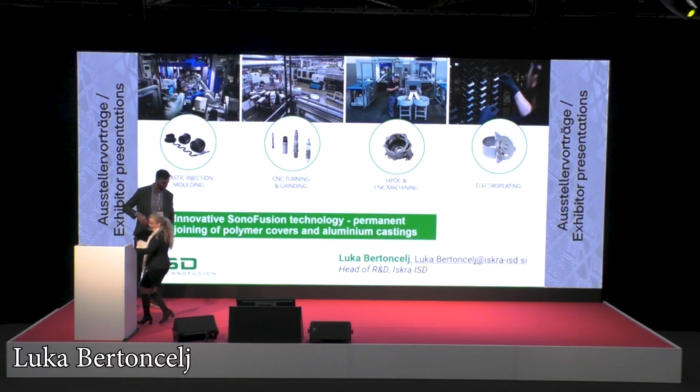Hello from my side. My name is Luka Bertoncelj. I'm responsible for R&D at the company Iskra ISD.

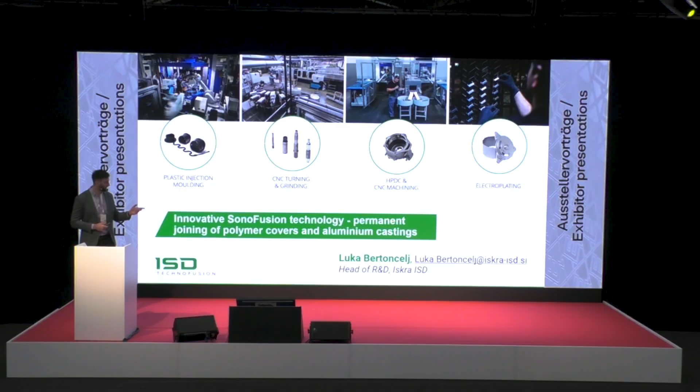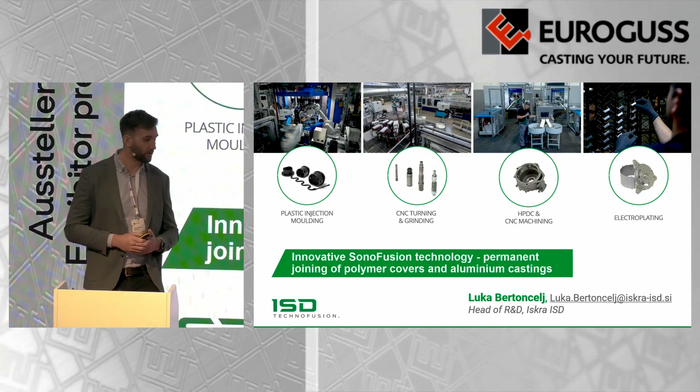Today I will be presenting a topic which is not directly related to casting itself, but a combination of casting, plastic injection molding, and joining. First, just a few brief slides about the company, I won't be too boring with this.

In general, we're focused on automotive and commercial vehicles. This is our main focus, but we're also present in medicine, electronics, and other relevant industries. We work together with the usual suspects from automotive, mainly Tier 1 suppliers.

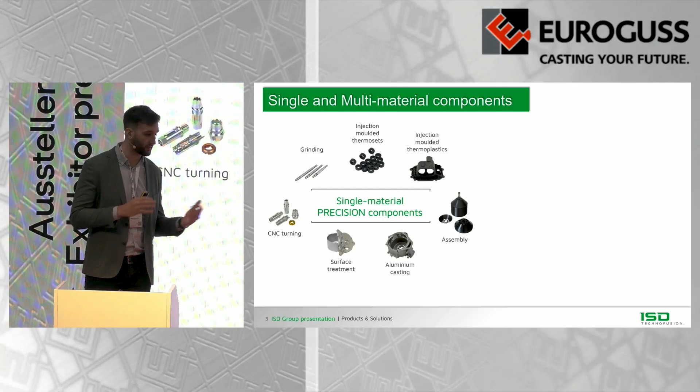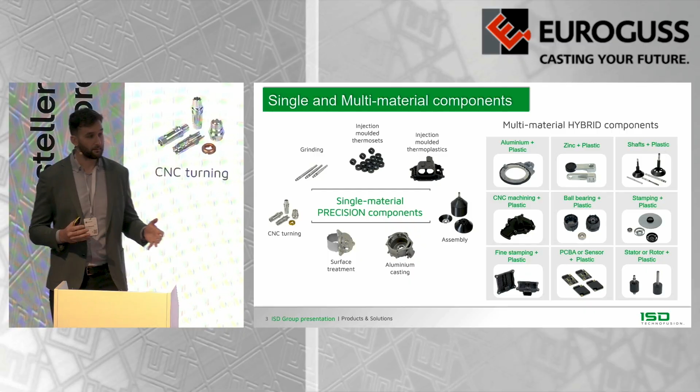Our focus was originally in high-precision single material components, such as plastic parts from technical polymers, aluminium pressure casting, turning, machining, and electroplating. But in the last 5 years, we've really focused on multi-material hybrid solutions, meaning you join metals and polymers, because in some cases you need mechanical strength from metals, but then you need other properties from polymers which cannot be substituted with other metals.

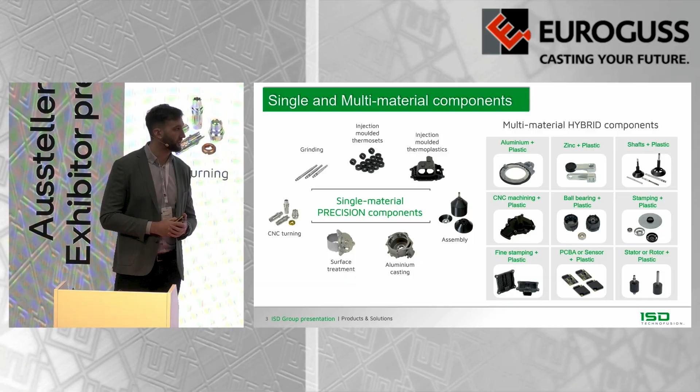So it means we always try to combine these different manufacturing technologies, such as plastic injection molding, casting, machining, and turning, to then develop and produce unique hybrid solutions.

We have two proprietary technologies that we see as definitely a benefit for the challenges in the upcoming future. The first one is LaserFusion, and the second one, which I'll be presenting today, is SonoFusion.

In short, LaserFusion is basically surface modification of metal surfaces for consequent injection overmolding or onmolding of polymers. So you avoid using glues, plasma treatment, or any other surface activation methods to join polymers and metals together. With SonoFusion, the difference is that you prefabricate the polymer and metal part, and then consequently join them together. So today I will be presenting this technology.

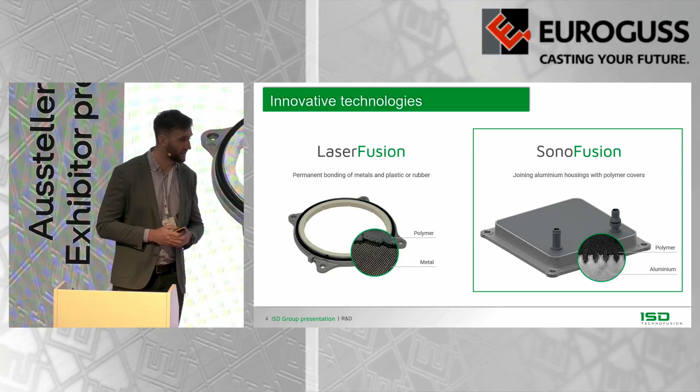But perhaps in short, we should look at why such a solution would make sense for the upcoming challenges. We know that especially in automotive, but also other industries, size matters.

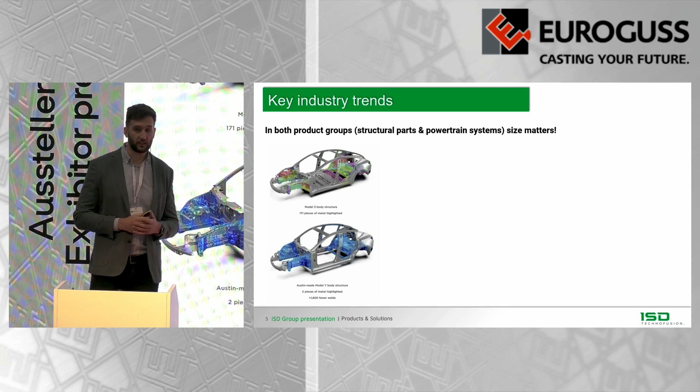I would say there are two major trends we see right now. On one side, you have larger and larger structural components, gigacastings, which Tesla started. Now Volkswagen has also presented their own first gigacasting or megacasting, as they call it. So we see structural parts increasing in size because cars are a commoditized product now, meaning everyone tries to manufacture a car with the least amount of components necessary to have the desired function.

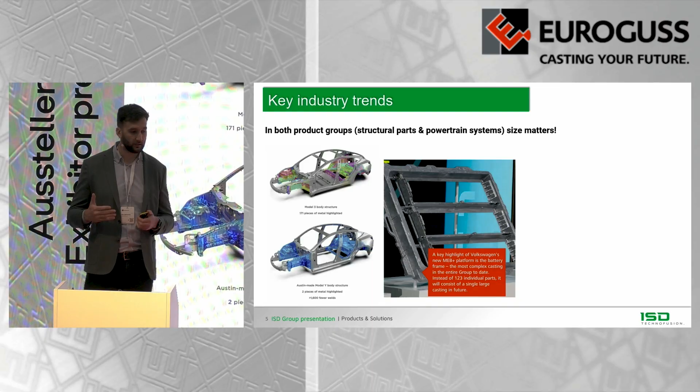On the other side, we have propulsion units, which we see shrinking in size, meaning because of higher efficiencies of electric motors and powertrain units, the powertrain units themselves are reducing in size while power density is increasing. So our company is especially focused on this side.

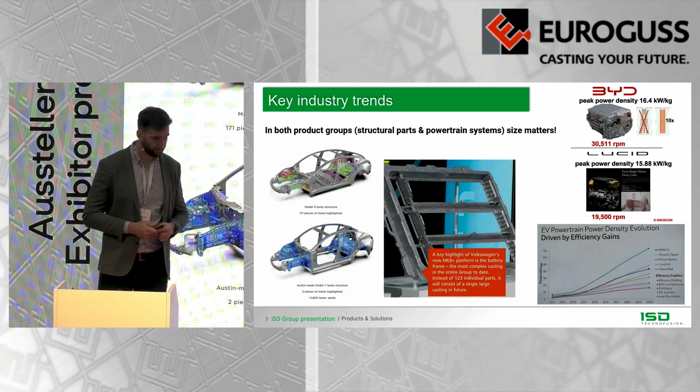Also, regarding trends in e-mobility, we see that in the last 2 or 3 years there was a very harsh market push for electric vehicles. Now we see a record number of new electric vehicles being registered, and obviously in the upcoming years this trend will most likely keep going.

But every single electric car faces the same problem: thermal management. How to regulate temperature, how to remove heat from areas where it's not necessary or needed, and take the heat to the locations where it is needed.

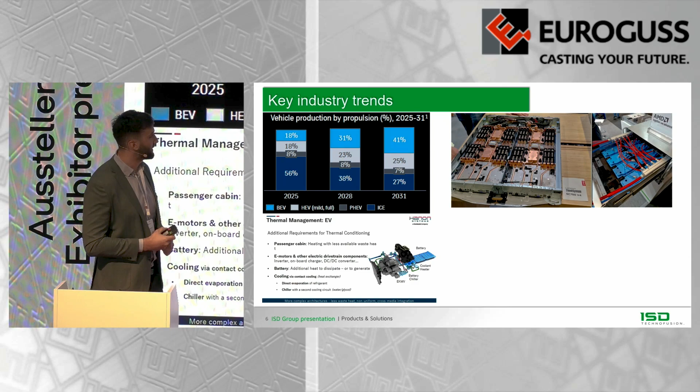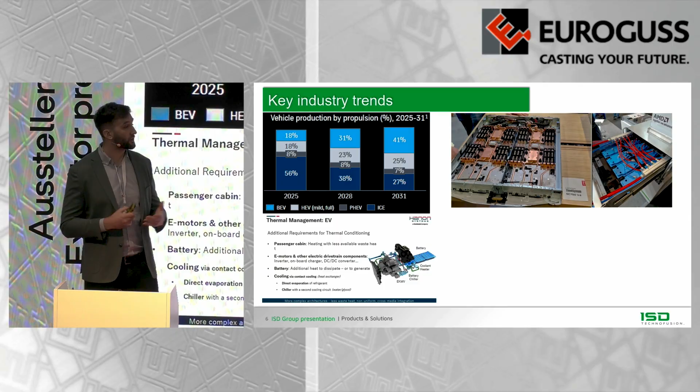We can see from one of the presentations of Hanon that everything evolves around thermal management. The same philosophy applies to AI computing. Last year we visited the AI computing fair in Hamburg, where AMD, NVIDIA, and other OEMs in the computer industry showcased their thermal management solutions. You can see the same philosophy of how to remove heat from areas where it's not wanted. So we see the same challenges arise in both industries.

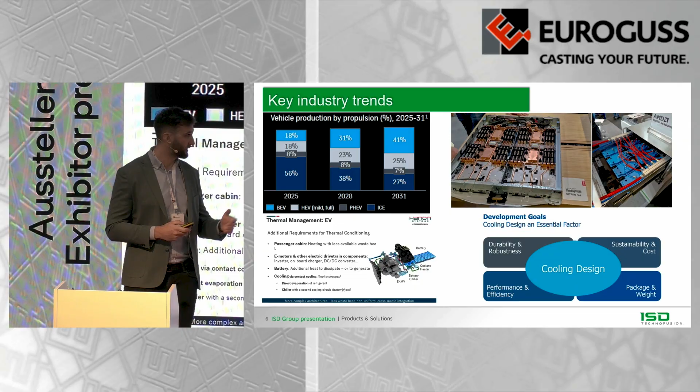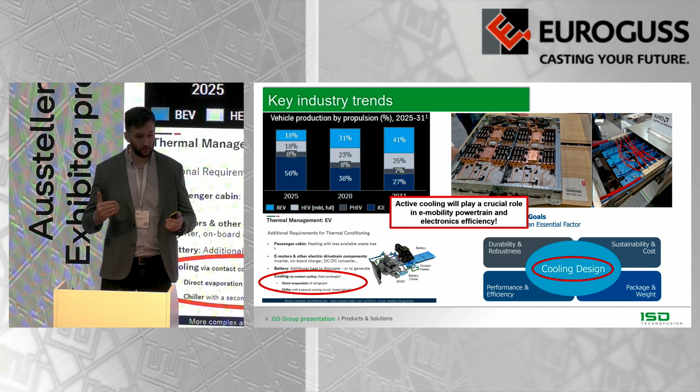If you also check the development goals of ZF, a German Tier 1 supplier, you can see that for their electric motor design, cooling is in the center. It means everything involves cooling, which means that in e-mobility, to increase efficiency, you need good, technically well-suited thermal management solutions.

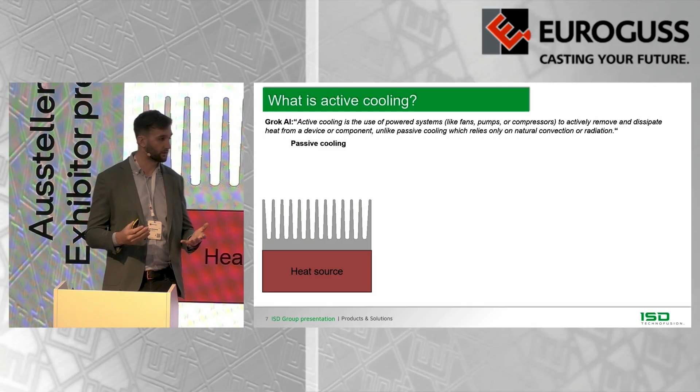If you first take a look at passive cooling, if you have a heat source - it can be a chip, it can be an electric motor - you basically just position on top a material with high heat conductivity, with some specific design features to increase the surface area. You're limited more or less by the convection and radiation, which is limited to the material characteristics and the design itself. So you're very limited in how much heat you can take out.

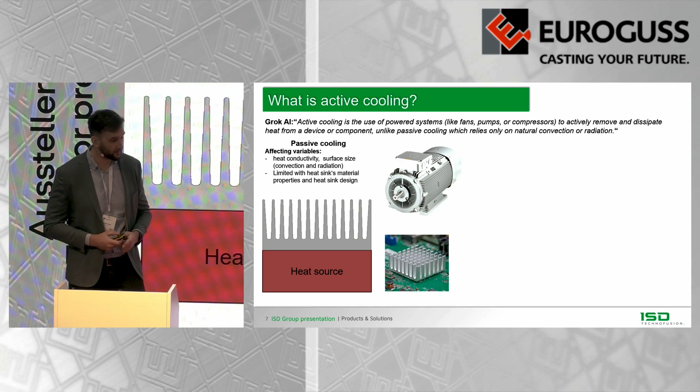We see this solution quite commonly in industrial electric motors, where you see all these fins to remove the heat, or even in electrical applications where you have heat sinks with different ribs, again to improve heat removal. But the main problem comes when we're speaking about powertrain units.

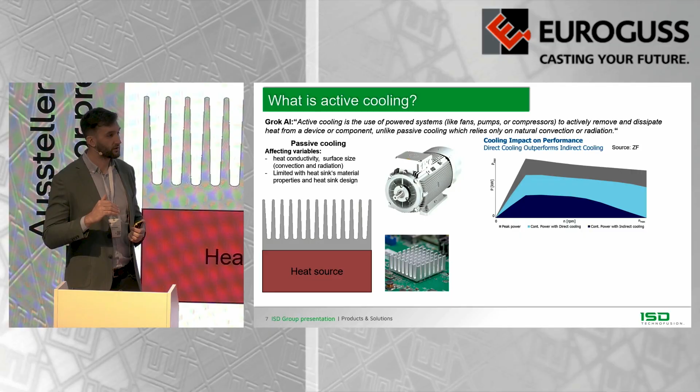For example, this is a graph from ZF that shows how much of a difference an electric motor makes if it's actively cooled in contrary to passive cooling. It means you can have almost twice as high continuous output power. So it definitely makes sense to work on different concepts and ways to actively cool either the stator package, the rotor itself, or any powertrain or electrical components where you have high currents. High currents mean high heat losses.

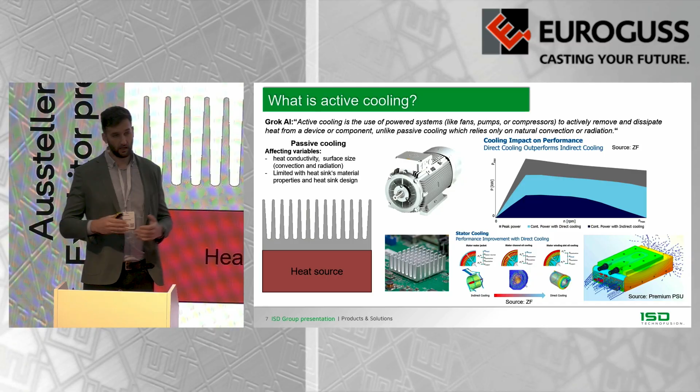Active cooling itself is obviously not the cheapest solution because, again, you need a pump, you have leakage tightness challenges and so on, but the efficiency increase is so much higher that for high-end applications it's definitely the future.

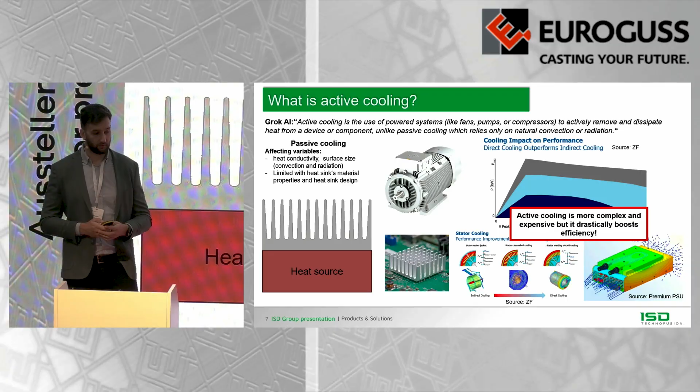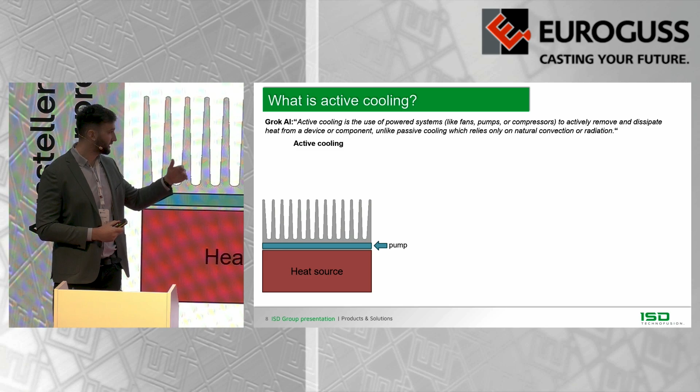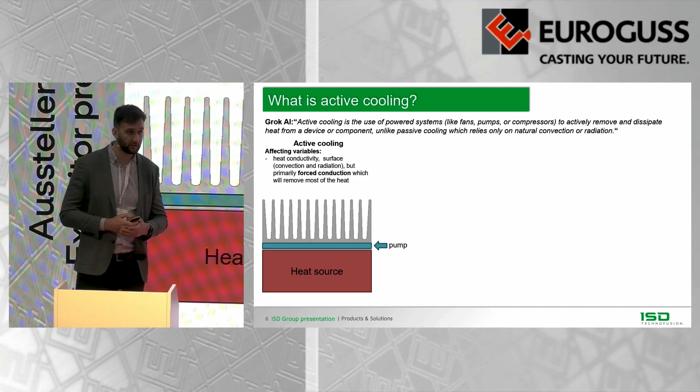If you take a very simple active cooling concept and just upgrade our passive cooling from before, you basically just need some kind of cooling channel integrated inside the heatsink, and then a pump that pushes the medium through. In this case, you have forced convection, which will remove most of the heat, or be the main mechanism to remove the excessive heat.

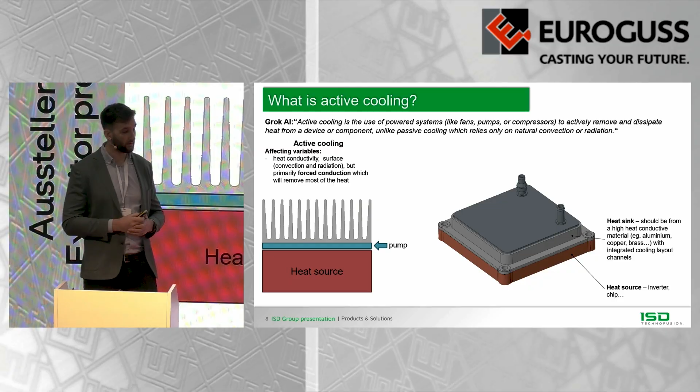In practice, it means you have a heat source, then you put a heatsink - a metal that has high heat conductivity. It can be a high-pressure die casting part, even though aluminium alloys for casting, due to high silicium content, have much lower conductivity than standard aluminium. Then you need a cover to cover everything up, and an inlet and outlet to push the medium through. And obviously, in the end, you need a pump that will push the glycol or whatever you might be using to remove the excessive heat.

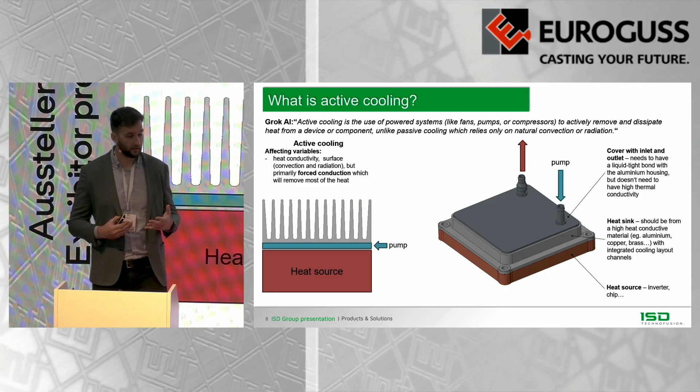The main question, obviously, is how to design or manufacture such an actively cooled subassembly or component that will work in different operating conditions and that will also be cost efficient.

Right now, I would say you have three main technologies on the market addressing this challenge. Obviously, you can have a standard assembly where you have an aluminum housing, a metal cover, machined inlets and outlets, a sealing in between, and then some screws to join everything together.

This is a very good solution if you have small quantities, meaning, let's say, a few hundred to a few thousand parts. As soon as you have a few hundred thousand parts, you need to tighten a lot of screws and have a lot of sealings. It's very challenging to have a good leakage tightness system, so a lot of different assembly steps are needed to manufacture such a subassembly.

Now, the second one is friction stir welding, which I'm sure many companies today are also showcasing, and it's a great solution, especially for larger components. But the main problem here is that you first need quite complex and expensive clamping systems to hold the part together during the welding process. You also have a friction stir welding tool that eventually wears out, it can break, so you need to monitor a lot of different parameters to really have a good solution.

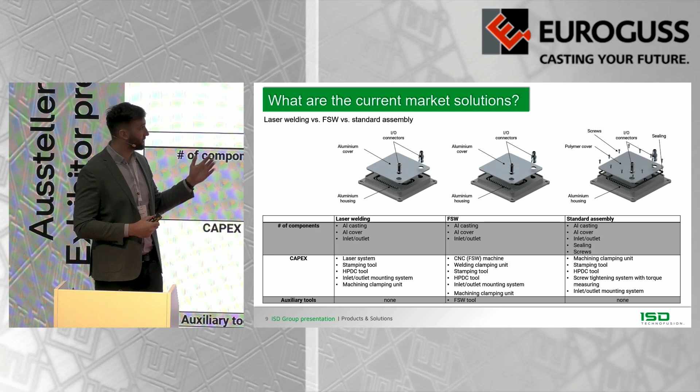Normally you also need some additional machining to remove the burr. The third solution, which I think is now substituting friction stir welding in many cases, is laser welding, which has already been presented at the last two Euroguss fairs. A lot of suppliers are now focusing on this - I think it's definitely the way forward. But you're limited in terms of material selection, and it's more or less just a direct substitute to friction stir welding.

The technology I'm going to showcase is the fourth solution we're proposing. It's not a universal solution, but it's definitely a solution for smaller actively cooled parts, up to 300 millimeters in size, where we remove the metal cover on top and substitute it with a polymer cover.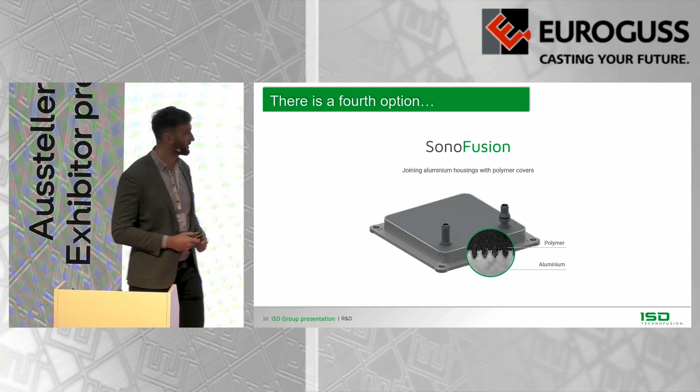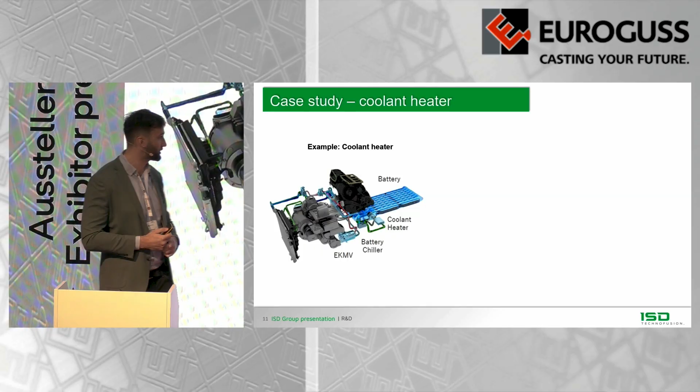So again, the basic logic is you have an aluminium or other metal heatsink, and then a polymer cover with integrated inlets and outlets on top. I'll showcase this technology on one of the current projects we're working on with our development partner and Tier 1 supplier. It's for the application of a coolant heater. Let me first show you a schematic to understand.

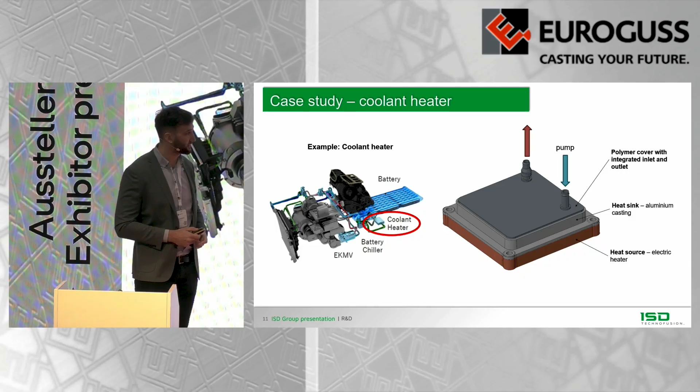You have a heat source or heater which heats up the aluminum heatsink. The aluminum heatsink, now hot due to the heater, heats up the glycol flowing through the channels. A pump pushes cold glycol through the casting, and hot glycol exits the part. This is the basic operation of this sub-assembly.

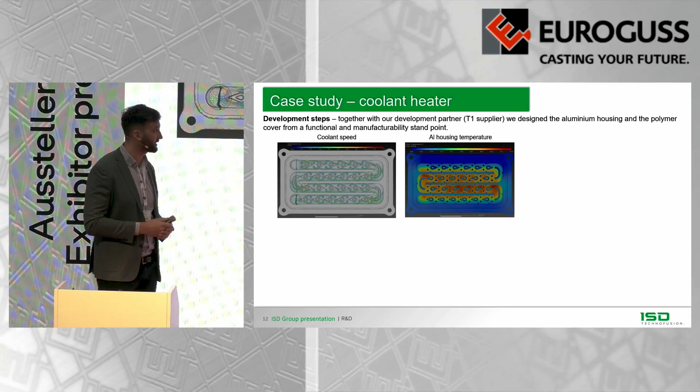There were some development steps to design the right fins. Our partner made several iterations to reach the best flow and best heat removal from the aluminum to the medium. We also did several simulations to make the part manufacturable, with low porosities, low gas porosities—all the usual suspects from casting.

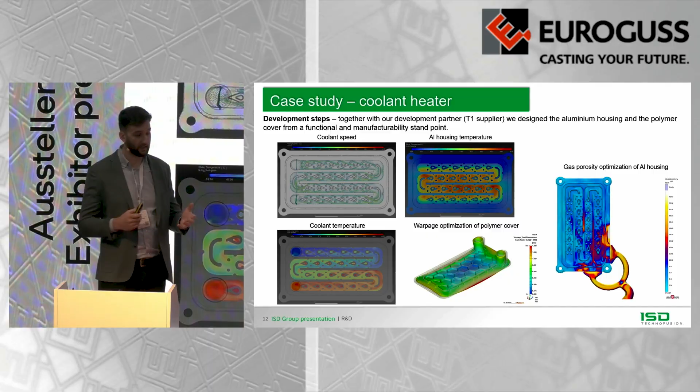On the other side, a lot of effort was put into the design of the polymer part, because it needs to be flat, and also into the polymer selection itself. Even though many casters are not so well informed about polymers, polymers in many cases, even mechanically, can be better than cast materials. That's why we proceeded toward substituting metal covers with polymer covers.

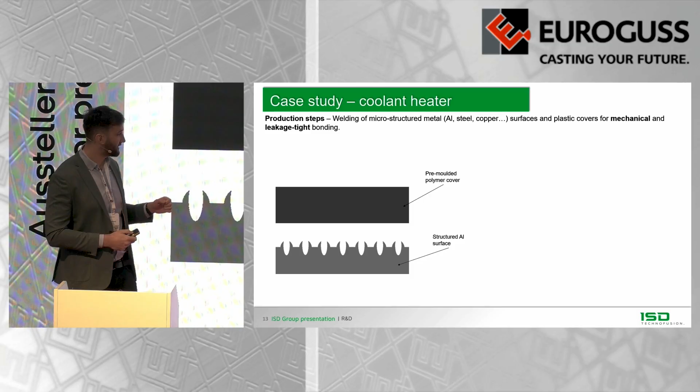So how does it work? In short, a simplified manner: we have a metal part which we laser treat, developing a specific surface structure that acts as a small mechanical lock. Then we have a prefabricated polymer cover. We preheat the welding area, and then join everything together. This is a very simplified concept just to help you understand the basic logic.

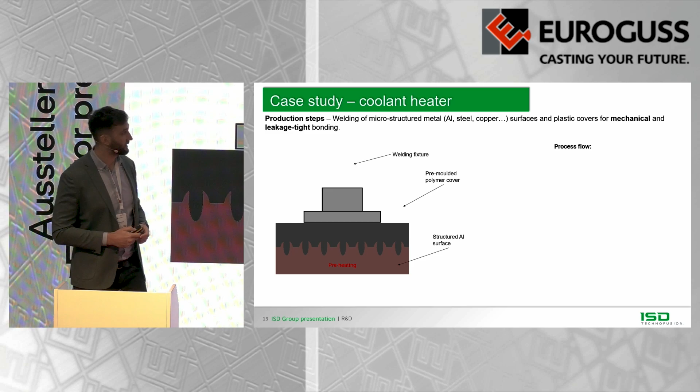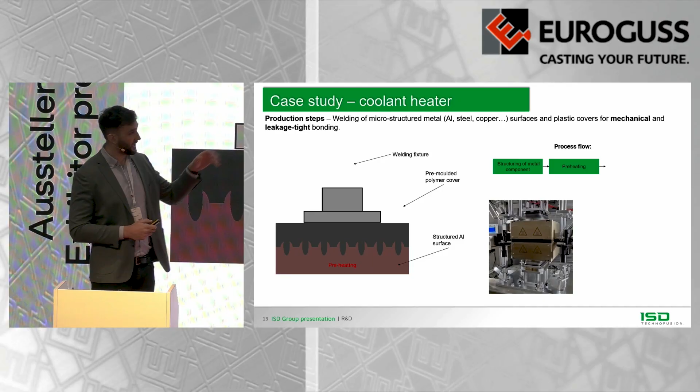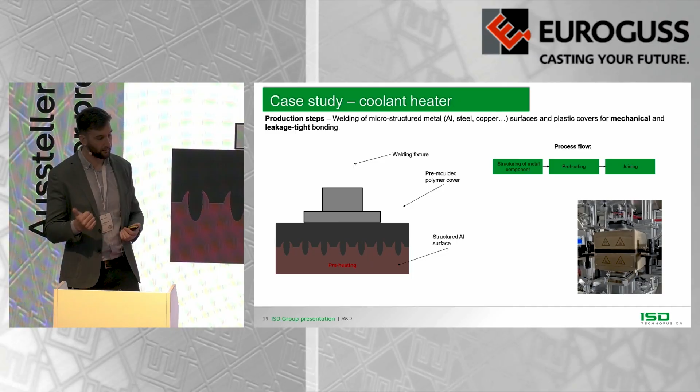Let me also show you the process flow—it's a very short one. Here we have the part. First we do the structuring process. Then in the next stage, we preheat the welding area. After preheating, the heating head is removed and the parts are permanently joined together. It's a very short, simple process that removes several additional steps you'd normally find with friction stir welding, laser welding, or a standard assembly process.

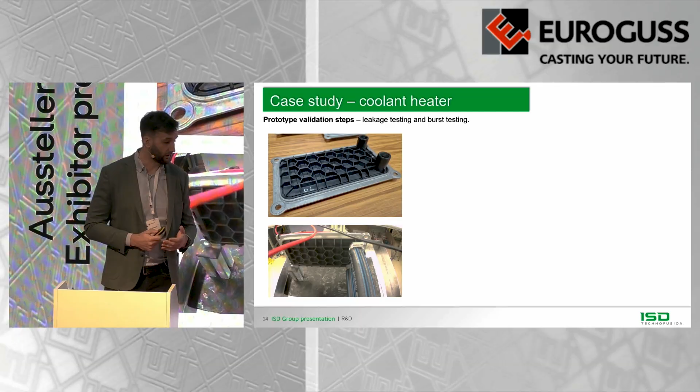This is one of the first prototypes we produced. You can also check it out at our booth. We're right now doing burst pressure tests and fatigue tests, and we've been able to reach up to 7 bars of burst pressure.

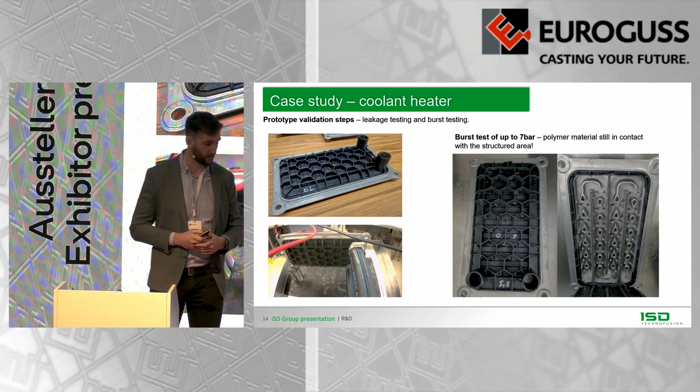The most important point here is that the welded, structured area was stronger than the polymer itself—you can see the polymer cover at burst test broke around the welding area, not at the weld. So the weld itself withstood the required pressures. 7 bars is more than enough, since the majority of applications in active thermal management will be around 2 to 3 bars, depending on the customer's use case.

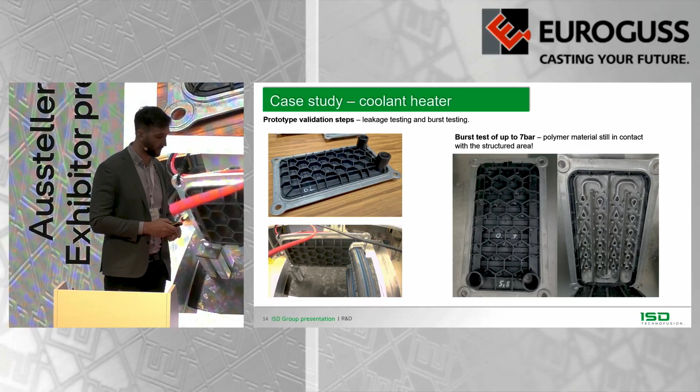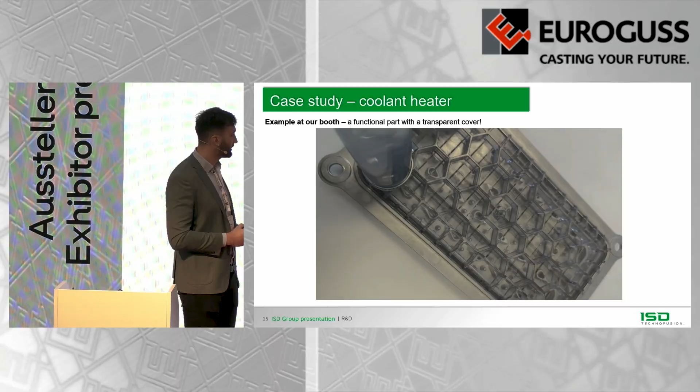We also have a transparent part made of polycarbonate so you can see through it and understand the design a bit better. You can check this part out at our booth too, for a bit more of a fun experience of how this design works.

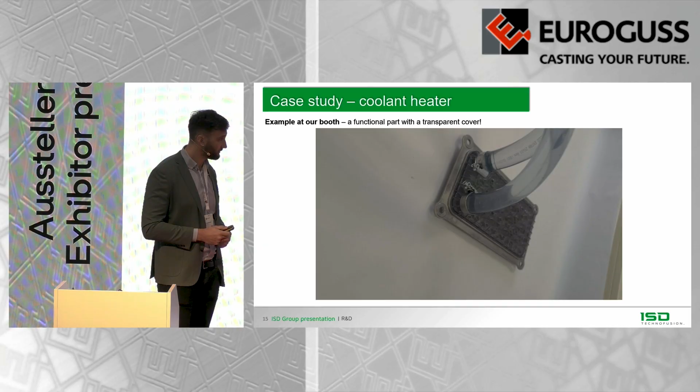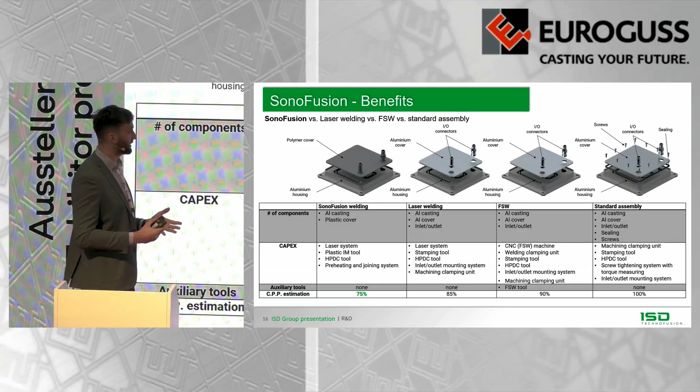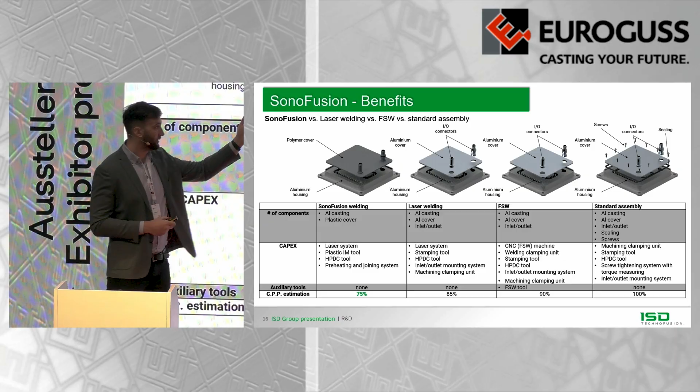With injection molding we can simply integrate the inlet and outlet connectors without additional inserts. The tool complexity and design complexity can be much higher, giving you much more design freedom. If you wanted metal inserts in-molded in the cover itself, that's also possible. You can add a lot of additional features and functionalities in the cover itself, which would normally not be possible with casting or stamped covers.

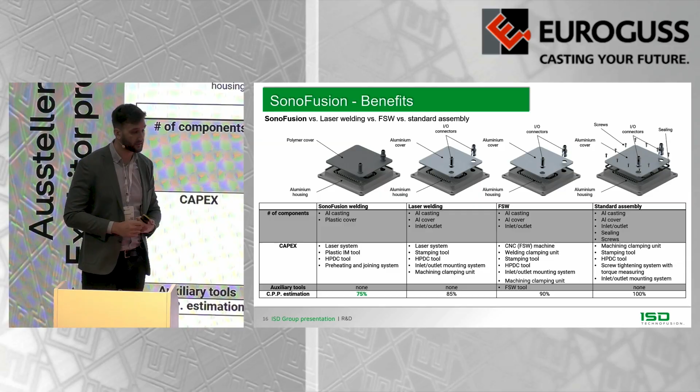Also in terms of investments or just the process flow, you need just a plastic injection molding tool. You need a casting tool if this component is cast. This component could also be stamped or deep drawn instead of cast. So just in terms of capex, you can be more cost efficient and also more energy efficient, which nowadays, like it or not, is one of the very important metrics to follow.

So the main benefits of this technology in comparison with others - first, if you compare with standard assembly, you get rid of a lot of additional components: screws, sealings, and so on. Also the assembly process flow itself is much, much shorter.

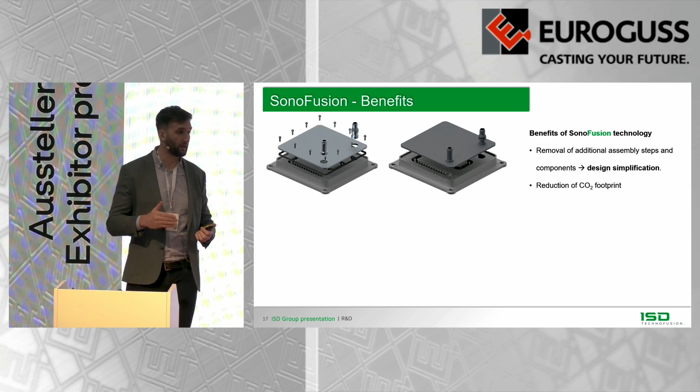Also reduction of CO2 footprint, because many people from casting are not familiar that polymers, especially technical polymers, are much more expensive per kilogram than aluminum alloys. If a 226 aluminum alloy costs around 2 euros, a technical polymer may cost 4 to 6 euros per kilogram. But the part cost of the polymer cover in the end will be 50% or even higher, cheaper than the casting.

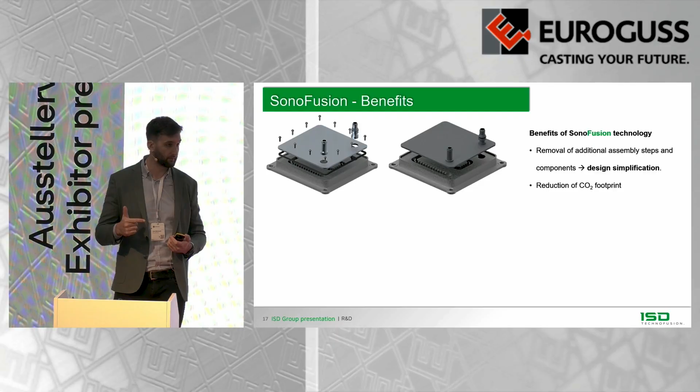Why? Because you only need an injection molding tool, which has 10 times the lifetime of a casting tool. You don't need any additional trimming tools or machining. Also, the energy consumption of injection molding is much lower because you normally injection mold polymers at around 280 or 300 degrees Celsius, while you cast at 600, 650 degrees. So energy consumption is much lower, and the process flow is shorter, which results in much lower cost of the part itself.

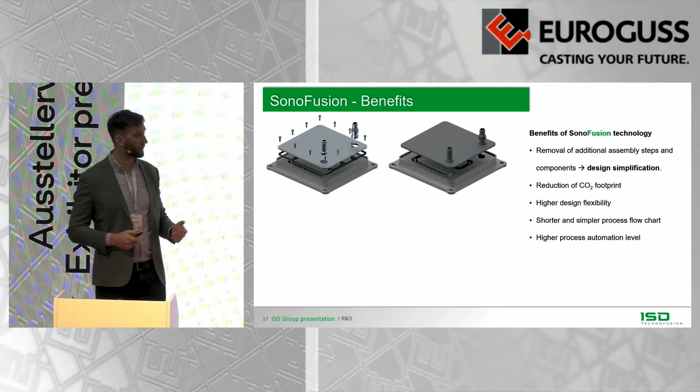Obviously, you can reach much higher design flexibility - more complex parts can be injection molded than can be cast. And the overall process flow is also much shorter. It also allows a very high automation level because, as you saw, you basically just need a preheating unit and a press to join the parts together - no really complex solutions to get the parts together.

Another benefit for sure is the design and material selection versatility, because you don't need a high technical polymer if your application only needs up to 50, 60, 70, or 80 degrees Celsius - you can take a very cheap technical polymer. If you have temperatures up to 140, 150 degrees Celsius, you can use PPS, a very high technical polymer with high operating temperatures. So you're very versatile in terms of what you want to achieve - we can adjust the material selection and the design itself to meet your requirements.

As mentioned a few times, cost is probably the main word in automotive. Even if you work long enough in automotive, you wake up with cost every day - everyone just speaks about cost. If you have a good technology and it's not cost beneficial in comparison with other solutions, no one really cares. So this is definitely one of the important points to highlight.